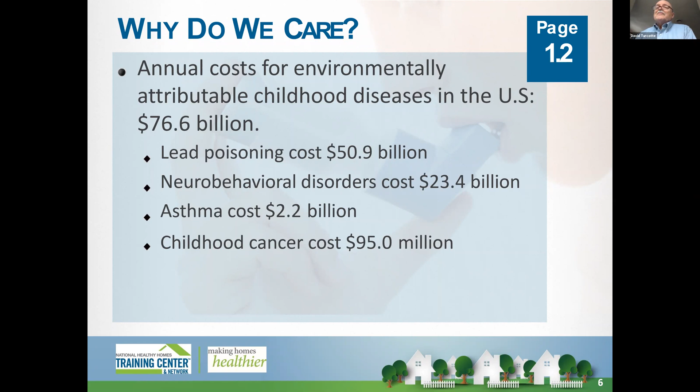For those who aren't familiar with asthma, I know many of you are, it can be serious. People do die every year, unfortunately, from asthma. It affects millions of people in the United States. And there's no cure for asthma. The best way to control it is medication and managing the environmental triggers. And that's what we're going to focus on today and in the other webinars, really addressing the environmental triggers.

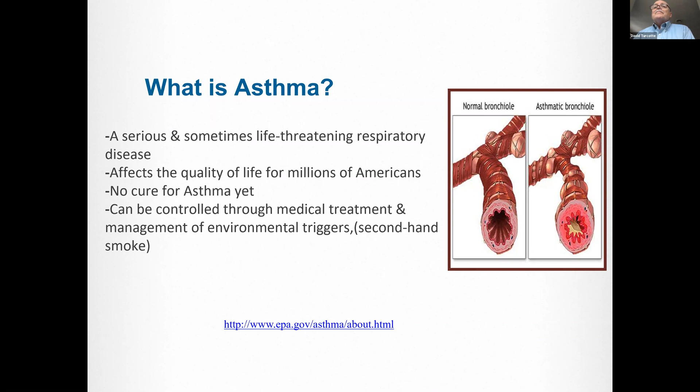So housing has been a problem in the United States. Every 2 years, the federal government does an American Housing Survey, and you can see how things have changed since 2007.

Those severe physical problems found in housing have decreased somewhat over the last few years. The types of housing that have moderate physical problems have increased in number.

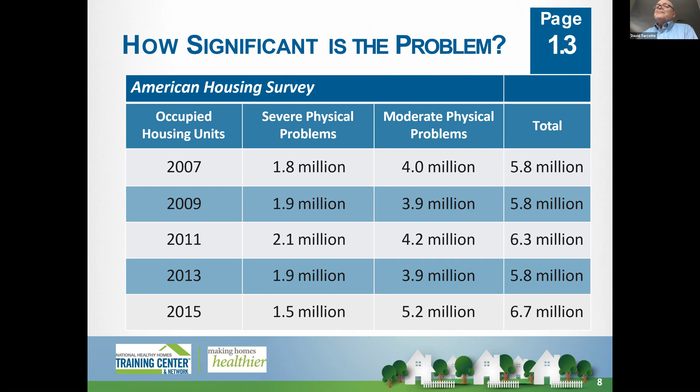And this was a report that was issued by the Institute of Medicine, which is an authoritative body that looks at existing medical and scientific evidence. And when they issued their report 20 years ago or so, they said that there are various hazards or issues in the home that could be affecting asthma.

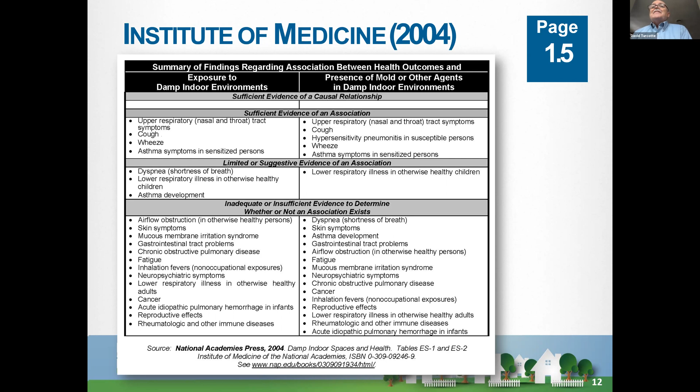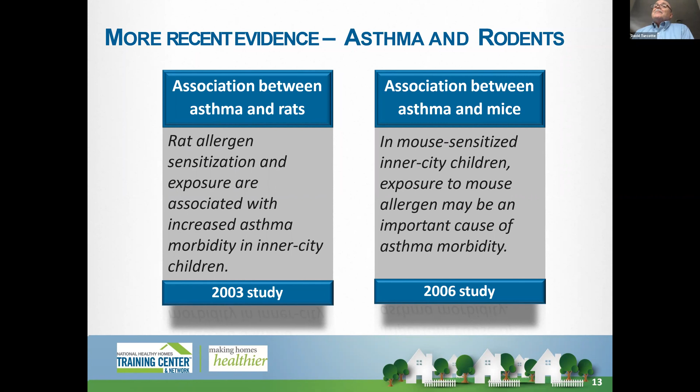And since then, there have been some other studies that have shown other associations. So it's clear now that the evidence is strong, showing that exposure to rats can worsen asthma conditions, and exposure to mice can worsen asthma conditions, as well as can also be an important contributor to actually causing asthma in someone.

Then in another report that was issued by the World Health Organization based on, again, new research, this shows that a lot of the evidence that was released by the Institute of Medicine is still solid, like asthma exacerbation, nothing's changed there.

But there's more sufficient evidence now that when you're exposed to dampness and mold, it could actually lead to the development of asthma. And the evidence is also very sufficient now in regards to it causing respiratory infections and exacerbating current asthma, as well as causing shortness of breath. So even if you don't have asthma, it could actually also contribute to issues of breathing.

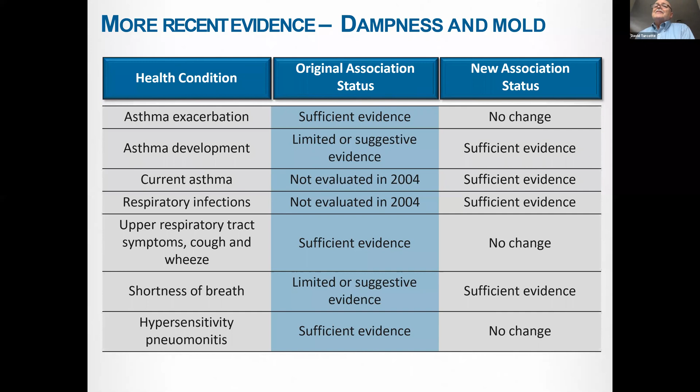So this is kind of local data. I know Springfield has the reputation of being kind of the #1 city in the United States. But this is some data that I received from the Massachusetts Department of Public Health, the asthma office. And right now they're showing that Holyoke, based on the most recent data that they have available, is actually higher than Springfield. Lowell, where I live, is high too, but not quite as high as Springfield and Holyoke.

But from the standpoint of the statewide average, all of these cities and most cities in Massachusetts have much higher asthma rates than the general population across the state of Massachusetts. So folks living in communities like Holyoke and Springfield are more vulnerable because of that.

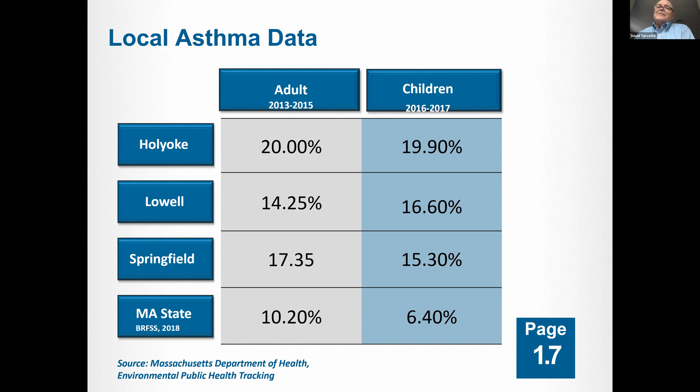So when we talk about how do you address these issues, we feel that the most effective way is taking an integrative approach, which takes into consideration the people who are living in the home, the individuals, the structure of the home, as well as the type of potential health hazards that they may have that make them more vulnerable to the exposure.

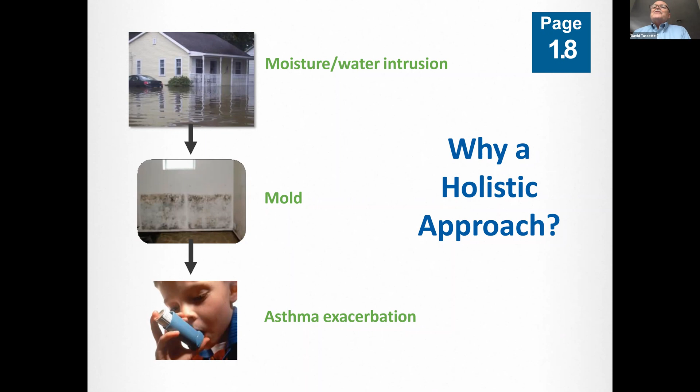So in addition to that, there's a lot of interconnectedness between these hazards. So this will show you some of that. Basically, if you're exposed to moisture and water intrusion into the home, it leads to mold development, which can lead to asthma exacerbation. And the moisture and water intrusion also leads to structural damage, which contributes to pest problems, deterioration of the paint, which then leads to lead poisoning. And deterioration of structure can also lead to injuries as well as fire because of the pest problems.

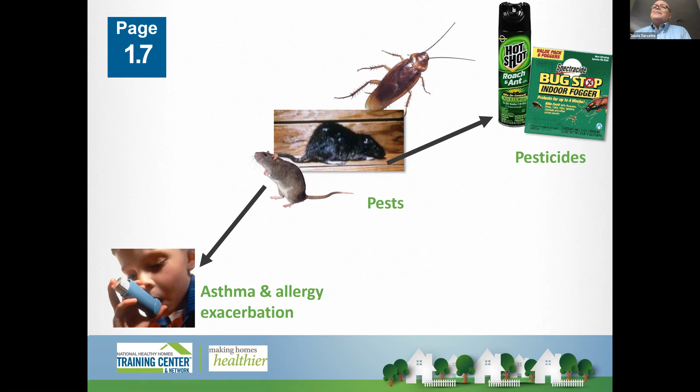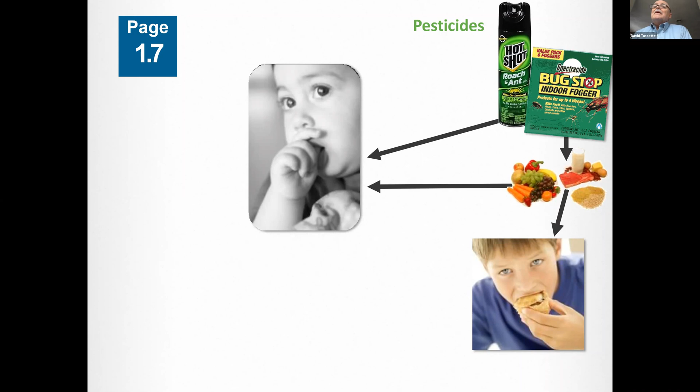And then because you have pests, pesticides will get introduced into the home environment, and the pests will exacerbate asthma. But the pesticides are also not healthy for children to be exposed to. They can ingest it by touching it on their hands, or by eating it, and that can make them sick. So all of these things are interconnected, and that's why it's very important to be taking a holistic approach when we're talking about this and trying to address it.

So the first principle that we're going to introduce is keep it dry. And at this point, I wanted to have Shirley introduce another poll, which will ask you to identify the most common types of moisture sources or leaks that you have seen during home visits. And this will be the last poll of the day. We're going to end the poll in a few seconds, so last chance to vote.

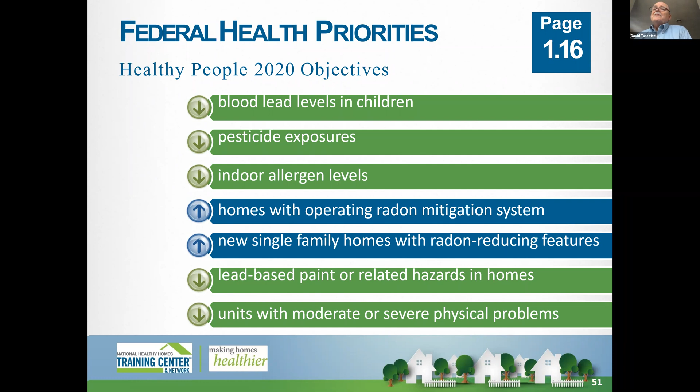So, as was indicated in the polls, based on people's experience and based on what the Institute of Medicine talked about, if you're exposed to mold and moisture, these are the kind of health consequences that individuals could be experiencing. And the last one, we're talking about the development of pneumonitis and certainly exacerbation of asthma and potential development of asthma by just being exposed to mold and dampness and moisture.

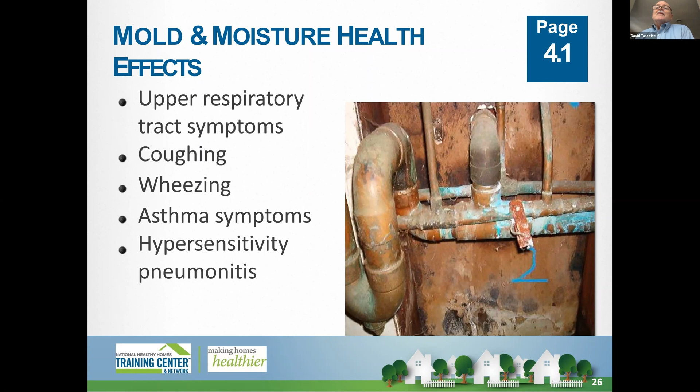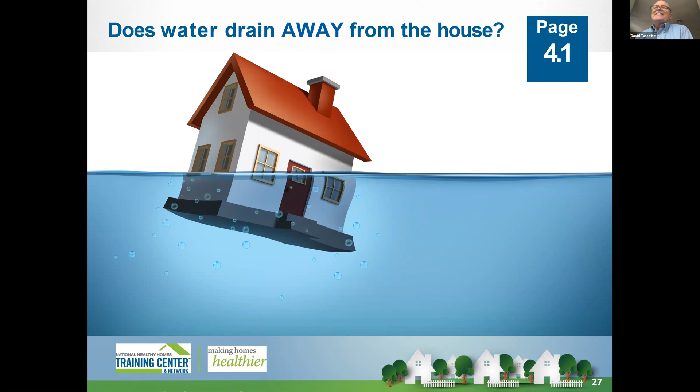So one key aspect to think about is, does the water drain away from your home? Obviously, in this case, it wasn't draining very well. But there's a lot of sources of moisture that can get into a home. If the rainwater and groundwater is poorly managed, it's likely there's going to be intrusion, plumbing leaks, as was mentioned by folks, and condensation is a common problem on the surfaces of the home, as well as construction moisture, coming up from the soil or during the process of construction.

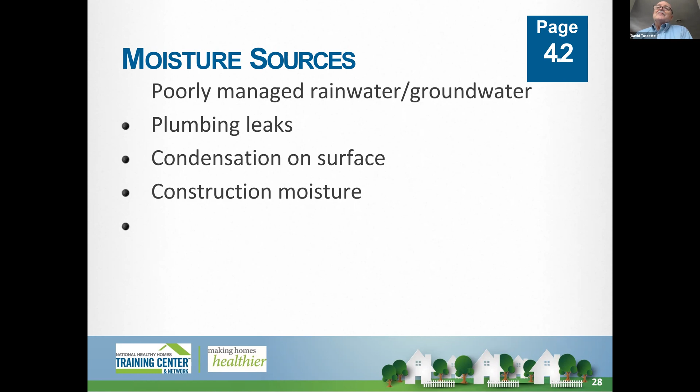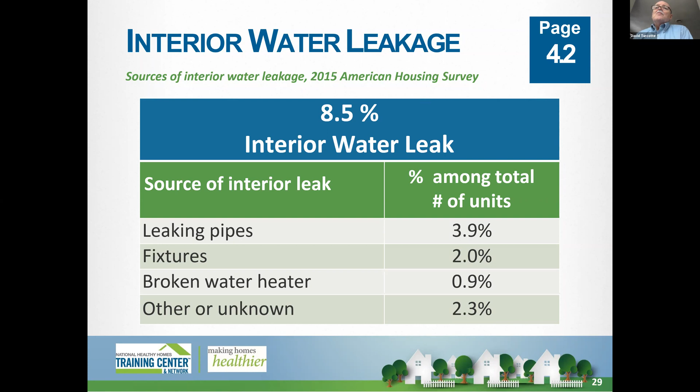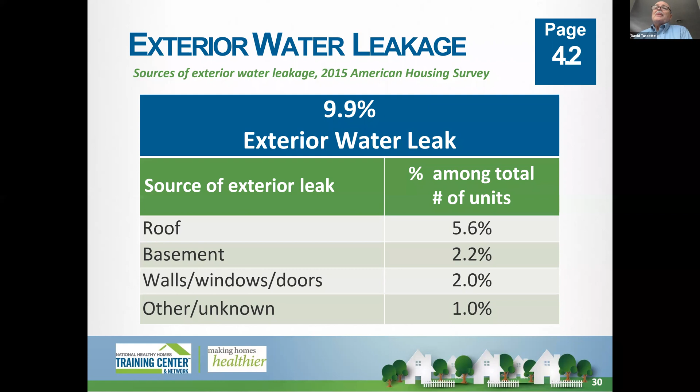So these are the most common interior leaks that were noted in the 2015 American Housing Survey. Leaking pipes is the most common, other kinds of leaky fixtures, and so forth. When we're talking about exterior, roof was mentioned in the poll as a common exposure issue. But you can also see a lot of leaking in the basement and on walls and so forth. And this indicates that 19% of the homes had more than one exterior problem.

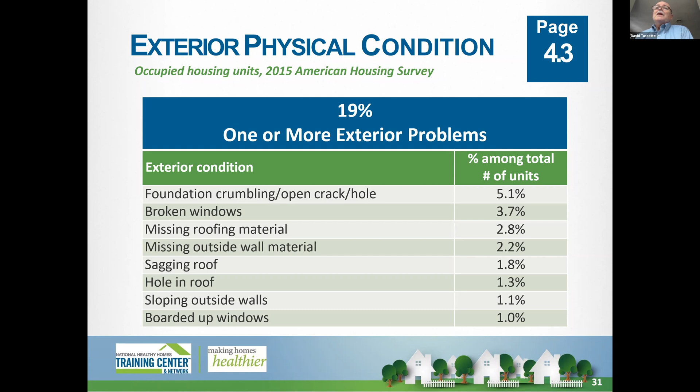But there's a lot of activities that we do that bring water into the home, from cooking and bathing and watering plants, breathing, washing, water vapor. Water vapor can also come in from the soil. There can be groundwater coming up underneath the home that can get into the home.

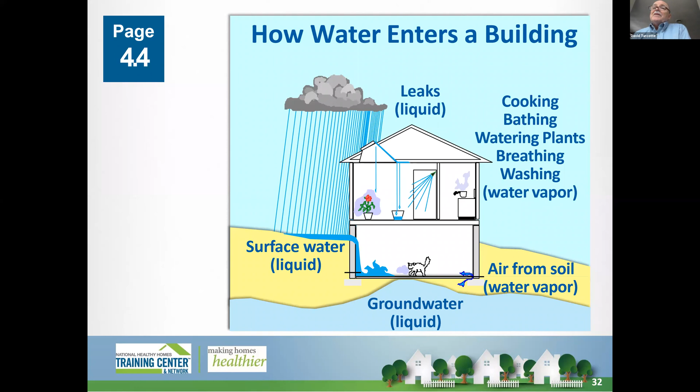And again, it's the importance of ensuring that the water is moved away and that the high point is against the foundation in the home and it directs water down away from the home, unlike what's happening here where you're getting water kind of flowing from the hill, down the hill towards the home.

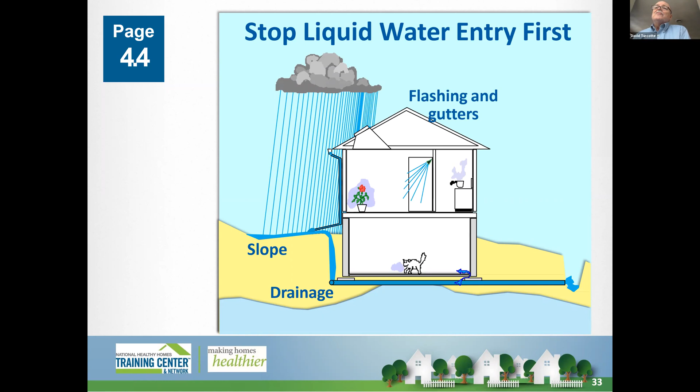And then, as you can see here, when people and animals breathe, there's vapor that gets into the environment, from plants also, from cooking and showering. So all these things contribute to moisture coming into the home.

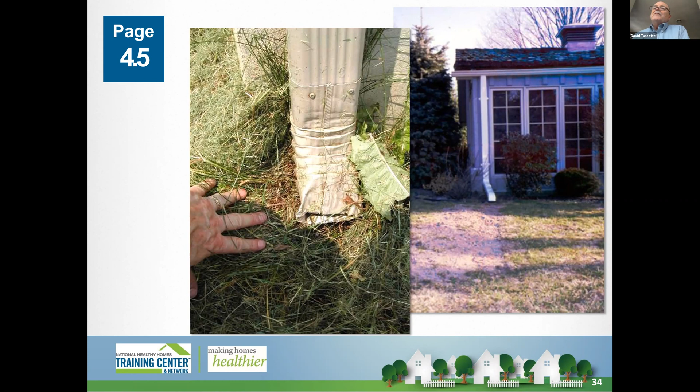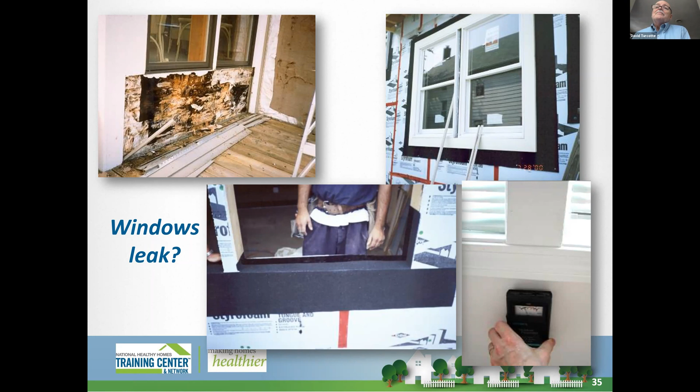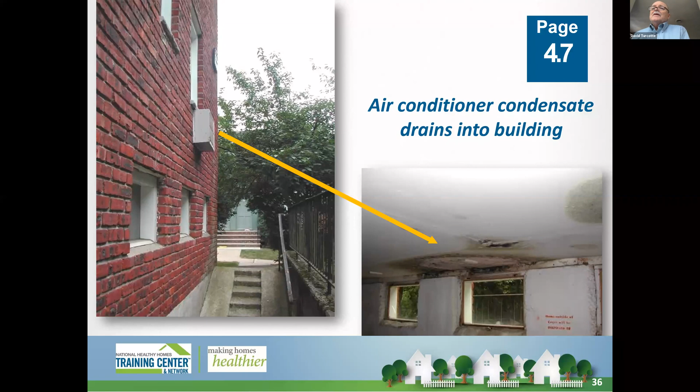And then here's another photo of another problem because of a bad installation: installing the air conditioner in the wall. The problem with that is that the air conditioner creates condensation on the coils, and over time that condensation started to lead to dripping of water and basically led to structural damage and mold growth in the apartment below that unit.

And then porous materials: all the foundations are very porous, so water can enter through the foundation. It can wick up from the outside along the concrete walls.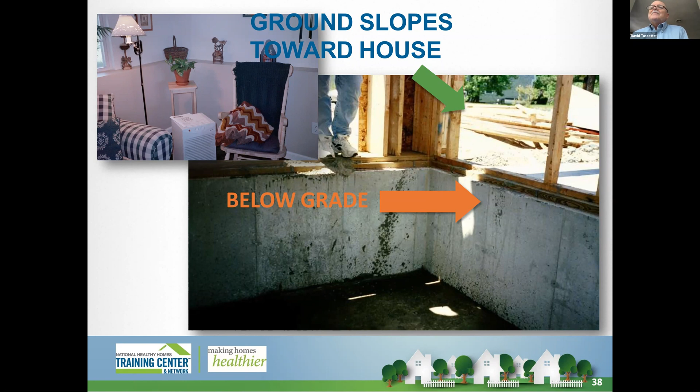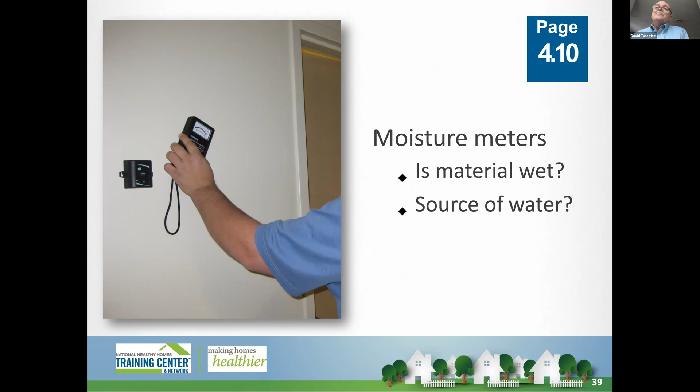And there's something called a moisture meter that you can use to help detect what the source of the leak might be if you're getting some leaking in the walls and so forth. So that's what this person is doing here, trying to identify where the leak might be. If there's a pipe behind that wall and there was a leak, then that would be a likely problem that might be causing it. There could be a leak on the pipe within the wall.

Most homes around here, as you probably know based on your experience, have basements, but some do have crawl spaces. And what this is showing you is a really ugly crawl space that you would never want to enter. But some of the common hazards that you would run into in these spaces would be mold, pests, pesticides, asbestos, lead paint, lead in the soil, dust in the soil, sewer gases, and radon, which we'll be talking about later in another webinar.

And so this is not a nice place you would want to be exposed to, but the problem is you have a floor above it. And if you get all of these contaminants underneath the floor, and if you have the HVAC system running through the crawl space, which does happen, you could be pulling in contaminants into the home as the air is moved through the system.

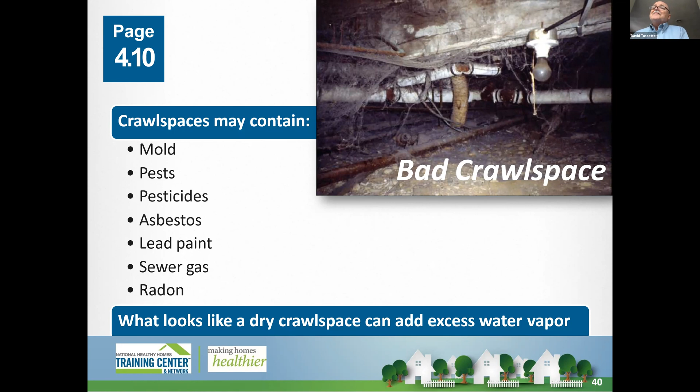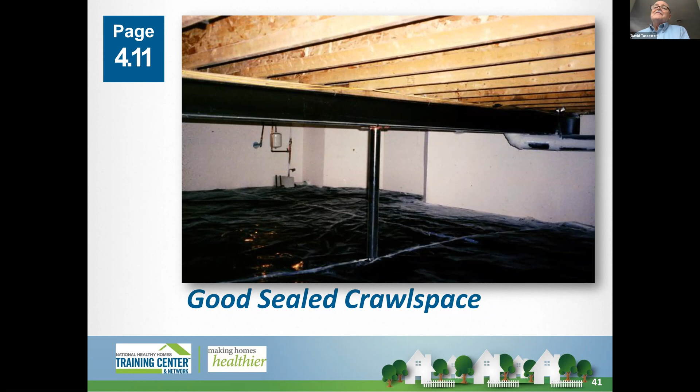So this is a better designed crawl space. Everything's well sealed and clean. And so there's not going to be any hazards in there that would have any impact on the residents living above it. This is another problem that I actually have seen in a condo building in Chelmsford, which is a town that borders Lowell.

This was a townhouse that was on a slab, didn't have a basement, didn't have a crawl space. It was just on concrete slab, and they basically put the heating vents and the AC vents under the slab. And so you had a lot of water draining and moving under the slab, and you had a lot of dirt getting into the vents, the piping that was run under the slab.

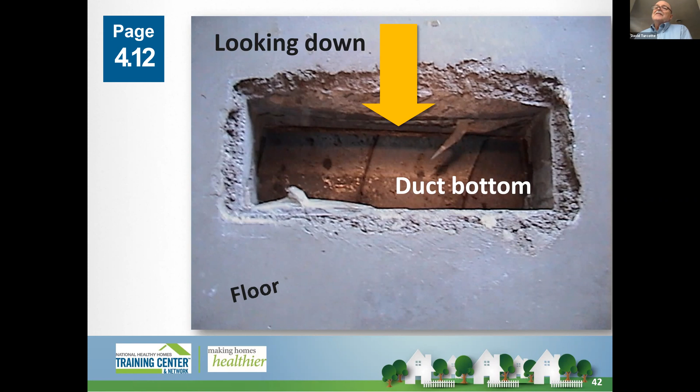And I actually looked down the vent and I could see that the vent pipe had been broken open, and that soil from under the slab had basically washed into it. So it's not the kind of situation as part of a design that you would certainly encourage. So this is something to keep an eye out for. It's not that common, but it does exist.

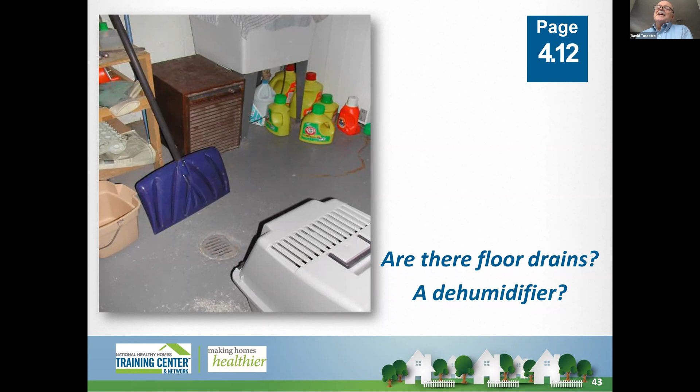The other thing is you want to make sure there's a way of draining water in the basement if possible. But you got to make sure that the drain is working and unclogged. And again, you really want to have a working dehumidifier in any kind of a basement, because they are generally damp environments. And if you don't have a dehumidifier, likely you're going to have mold growth.

So if you happen to have water coming into the basement, it's critical that you drain it as soon as possible, and that any kind of paper or wooden materials should not come in contact with the foundation floor. You should elevate them on shelving if you're going to have them in the basement. You want to keep warm, humid air away from the earth surfaces where it's cool, because that's going to lead to condensation, which will likely lead to mold growth, particularly if you've done some kind of remodeling or renovations in the basement. And you definitely want to have a dehumidifier.

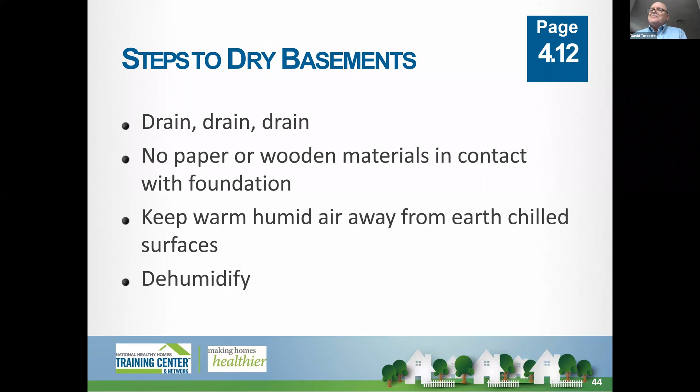So if you have water intrusion into your basement and you have a refinished basement, you really need to dry that basement out and those materials within 24 hours, maximum 48, or you're going to have mold growth for sure.

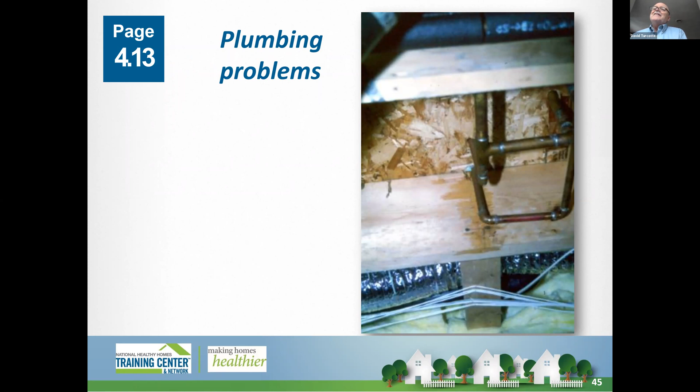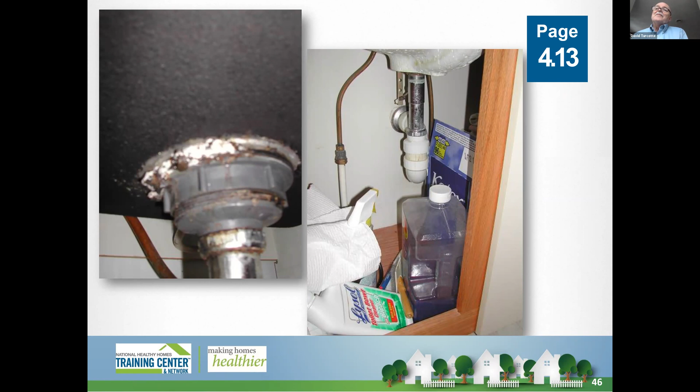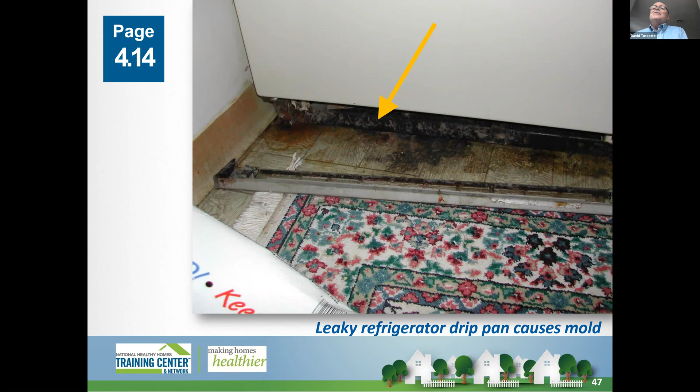This is a plumbing issue. You want to keep an eye out for plumbing problems, because you could have small leaks that over time lead to the development of mold. This is again under the sinks; the connections where the piping is connected to the sinks are where you likely would have some kind of leaking happen. This is under the refrigerator. You can also get leaky refrigerator drip pans that could cause mold to grow within the home.

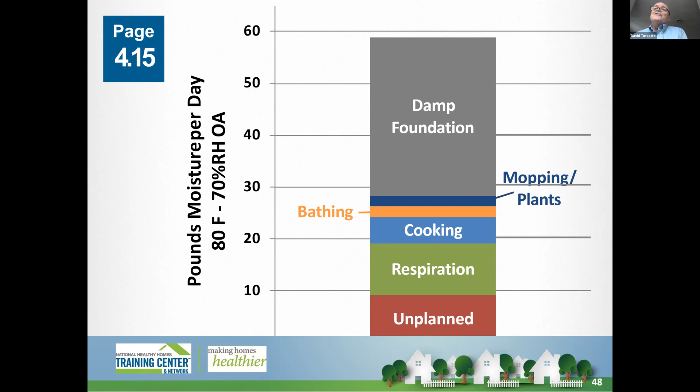And again, this is showing you on a per pound basis of moisture per day where most of it usually comes from. So as you can see, the bulk of it is often through the foundation, the dampness in the foundation, but all the typical activities in the home of washing, bathing, plants, cooking, respiration, breathing, contribute a lot of moisture in the home. The bottom of a toilet tank, a lot of times you can get condensation there, and that could be a source of mold.

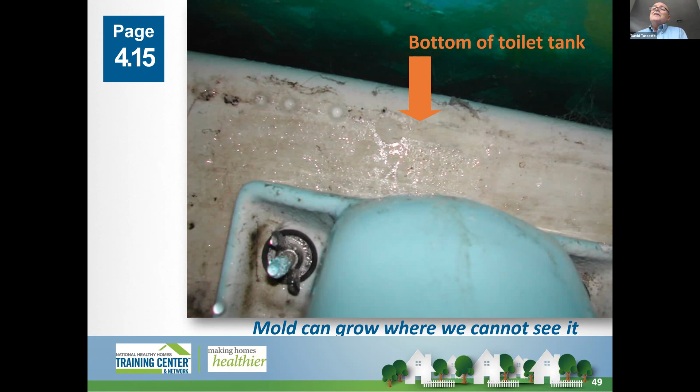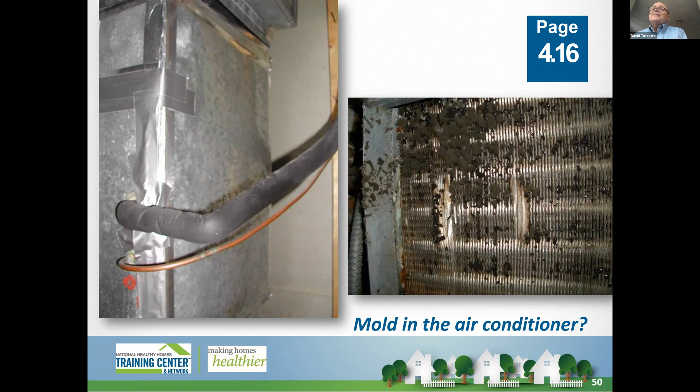The reason is that if you have moisture in the environment, moisture is going to go like a magnet to the coldest surface. And so if there's no insulation and this is the winter and you have some kind of vinyl wallpaper there, condensation is just going to accumulate where there's no insulation because that's the coldest surface, and that's where you're going to get mold developing.

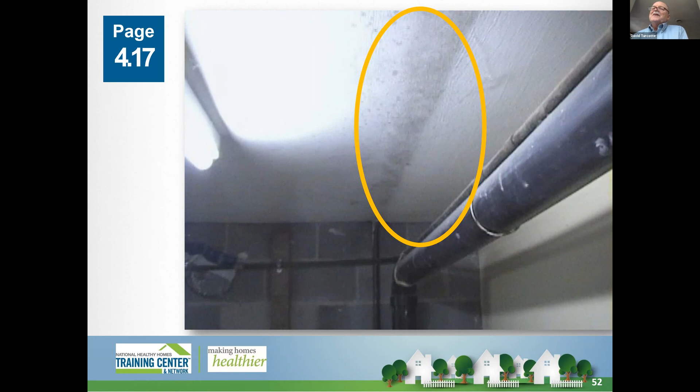And what you're showing here is that above here, you have another pipe and you're getting condensation on the pipes in a straight line. And so it's developing mold. And that's what you're seeing in this picture that's being circled by the yellow line.

So, you need to identify what the source of the mold is, because if you have mold, you can clean it up. But if you don't address the source of what's contributing to the mold growth, you're going to continue to have it over and over again. So you got to make sure everything's dry. And if it's a design problem, then you have to fix it so that it's not going to be reoccurring. Anything, like I said, that gets wet and it's still going to be in a damp environment, you got to discard because it's likely to continue to grow. And it's important to take these steps.

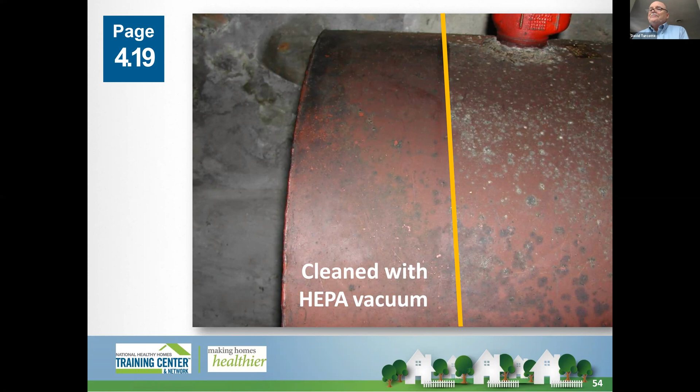And there's different ways of cleaning up mold. This is showing you on the left, it was an area that was cleaned with a good HEPA vacuum. On the right is kind of the mold, what it used to look like. Is someone actually using a good HEPA vacuum to vacuum up some of the mold.

But if you're going to do any kind of cleaning of mold, if it's a small area of 10 square feet, you could do it yourself. Usually detergent and hot water is enough to clean up most mold. It's not too big. And you want to use a rag or something to do it. You don't want to use high pressure spray because that could just throw the mold spores around the environment and create a bigger hazard.

But you want to take precautions. You want to put on a mask. You want to have eye protection. You want to wear gloves and the coveralls and so forth. And you want to be able to not contaminate the rest of the environment by having mold spores on your clothing. That's why it's important to remove any kind of contamination and put it into bags and so forth.

If you had a real serious job, you'd have to have an outside contractor that specializes in this. And just like you would see with lead paint abatement, if you got a serious mold infestation, you got to seal the area while you're removing the mold, so the spores are not going to be spread around the home.

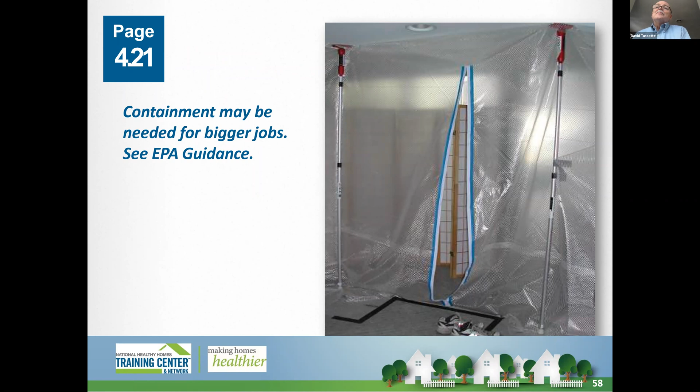So the key messages from the webinar is, excess moisture creates a lot of conditions that can have negative health consequences, and moisture in the home can come from internal sources or outside sources. And again, you should prevent excess moisture from getting in by appropriate construction methods, making sure you have a good working plumbing system that doesn't leak, and you have good temperature controls, and good ventilation can help keep the moisture down too, which we'll be talking about later in the webinars. And maintaining things. You got to maintain things to ensure that you're not getting excess moisture into the home.